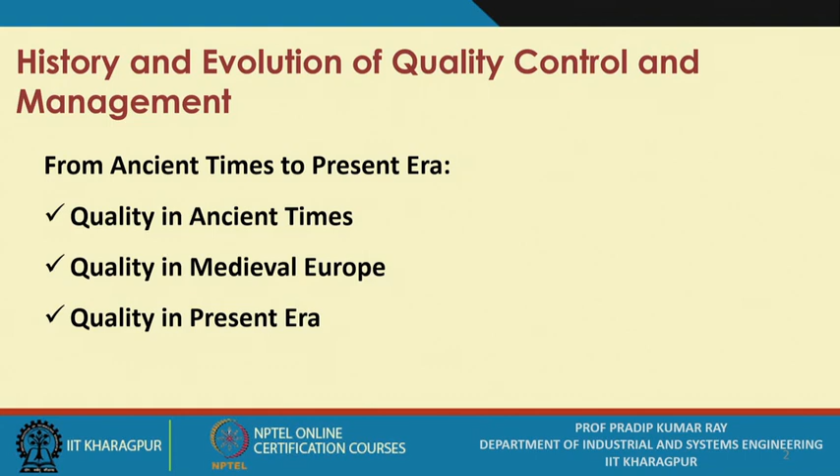One thing you must know at this stage is that the importance of quality is not a new issue. Since time immemorial, quality has been a serious concern in all that mankind has developed and used. The quality of civilization refers to the quality of living standards, products, housing, roads, and this awareness regarding the importance of quality is not a new one.

It started with the onset of human civilization. But before we refer to the various tools and techniques used under quality design and control, we should be aware of how the concept of quality was perceived in ancient times. Then we'll move to the medieval ages, and then the present era, mostly post 20th century onwards.

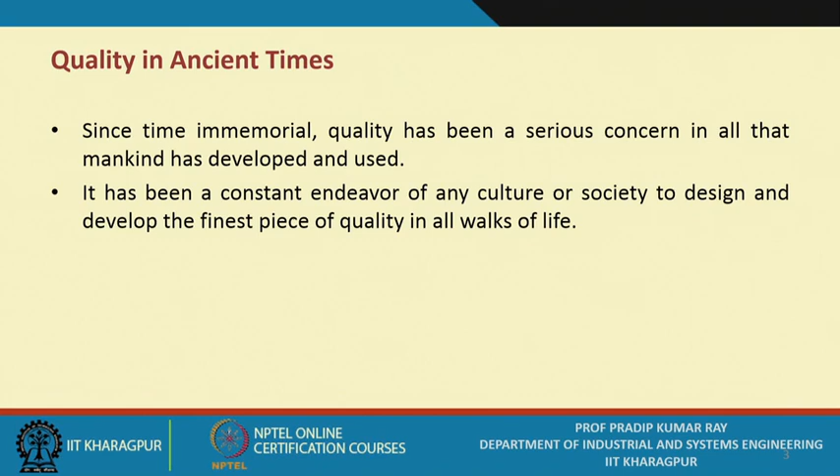There are hundreds of such creations referred to in the history of human civilization as the finest examples of quality. I will highlight a few. There are numerous such examples, like the pyramids of Giza in Egypt. This is a wonder, in fact - how could you design and manufacture such a product?

High roads and sculptures of the Roman Empire, the Hanging Garden of Babylon - these are the finest examples of quality. There were designers, quality experts, and manufacturers who created all these unique examples of quality. The Great Wall of China.

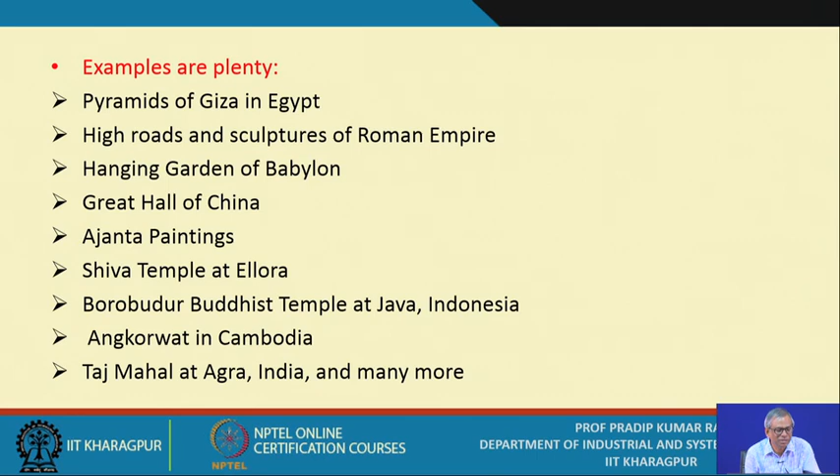This is not a hall, it's the Great Wall of China. The Ajanta paintings, the Shiva temple at Ellora, the Borobudur Buddhist temple at Java, Indonesia. Angkor Wat in Cambodia, the Taj Mahal at Agra, and many more. You are all aware of such creations. Whenever you visit any place, you see many such creations - in hundreds of cases, these are the finest examples of quality.

This continued for say 1000 years, 2000 years. Now, when you talk about medieval Europe, European organizations and systems contributed a lot to the field of quality since the days of the Renaissance.

In Renaissance Europe, in the 15th and 16th centuries - exactly 14th to 17th century - there had been the finest paintings and architecture developed. Craft guilds were formed. Initially, when they started creating quality products or quality systems, it was the responsibility of one individual, who used to be the designer, the manufacturer, and the seller of the products, all in one.

Subsequently, when demand increased, under the tutelage of one such quality expert, many persons needed to be trained. In medieval Europe, accordingly, craft guilds were formed, where apprentices used to be trained on quality of carpentry, painting, cloth washing, tanning, masonry, etc. This is very unique in today's context.

Like we have industrial training institutes today, we carry out many kinds of trade tests to build skills among motivated persons, workmen and all those. This is a must, in fact - without having skills, how can you produce a quality product? For creating a quality product, you need human labor, so skills are very, very important.

The craft guilds were formed even during the medieval age, many centuries back. In the craft guilds, there used to be positions like apprentices, then the journeyman, and the master. Their focus had been all through - why don't you become a good designer? And if you become a good designer, we expect you will become a quality expert in course of time. There are many such examples, in fact.

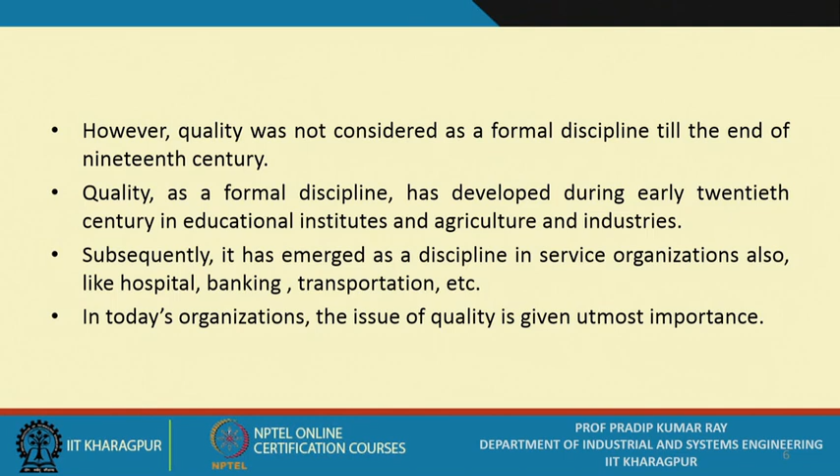However, during those days, quality was not considered a formal discipline till the end of the 19th century. It was individual based - under the kingship, the king may find someone who is really a quality expert, having some exceptional skills and knowledge. He used to be hired, or consulted for creating, say, a quality palace, quality roads, or quality painting. There are many such examples.

There are great persons, in fact, but this is absolutely individual based. There has been no formal system to create quality. So quality as a formal discipline has developed during the early 20th century in educational institutes, agriculture and industries.

Around 1908, 1910, when the Model T was introduced, it was mass production. When you go for mass production, obviously there is a requirement of a formalized system, and that system is a quality system.

So for the last 100 years or so, quality has existed as a very unique discipline. Subsequently, it has emerged as a discipline in service organizations also, for the last 50 or 60 years, like hospitals, banking, transportation, etc.

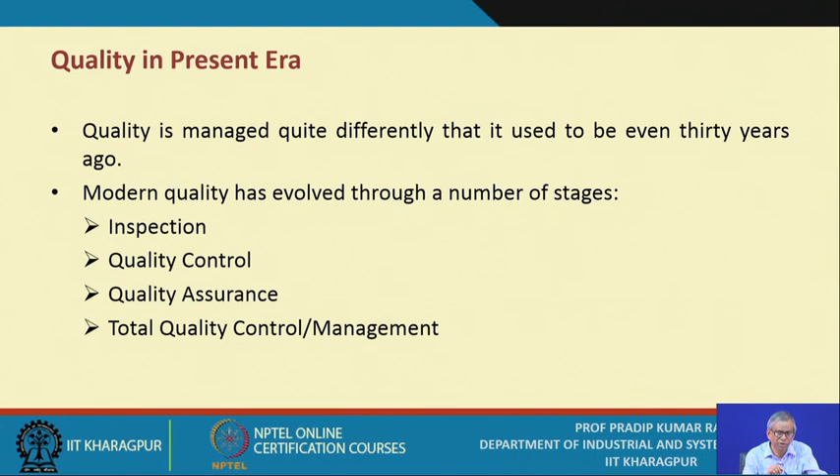It's a never-ending exercise or never-ending activity. So when we are really interested in incorporating quality in all sorts of systems, not only in the production systems, then it is referred to as the total quality control system.

So if we look at the characteristic features of a modern quality system, we sometimes refer to a benchmark system.

As a student of quality control and design, you should be aware of what are the best systems mankind has created with respect to quality features. When you look at such systems, and there are numerous such organizations, you study their quality systems, and in today's context you will find these quality systems, sometimes referred to as modern systems, have got some specific features you should be aware of.

The first one is customer focused. That means there must not be any argument with the customer. The product which I am going to sell to the customer, I will incorporate quality in that product as demanded by the customer. It is not what I want to deliver to him, but what should be the customer's requirement. So it should be based on fulfilling the customer requirements.

And defect prevention oriented, not defect detection focused—this is very important. Defect detection is essentially inspection-based quality control, where you are only bothering about inspection. Suppose I produce some 1000 units, and I know the production system is so complex that all these 1000 units cannot be defect free. So I expect there will always be some defects or defectives, and I create an inspection system to promptly identify all these defects. That is detection-based, but that is actually not a quality improvement exercise.

What you need to do is know the causes for quality deficiencies, and design the product and system in such a way that there will be prevention of defective items or defects while producing the product. So the basic message is defect prevention, not defect detection. That should be our goal for quality improvement, and ultimately it must become a way of life, part of organizational systems.

We come across several types of manufacturing systems, grouped under three categories. At one extreme you have the job shop, at the other extreme continuous processing, and in between batch production. So job shop, batch production, or continuous processing like a chemical plant. Batch production is normally repetitive manufacturing, like car manufacturing systems, and there are numerous job shops we have.

In any kind of manufacturing system, quality of products, processes and systems is the prime concern. Never assume that you only need to look into product quality—you must also simultaneously look into systems quality as well as process quality.

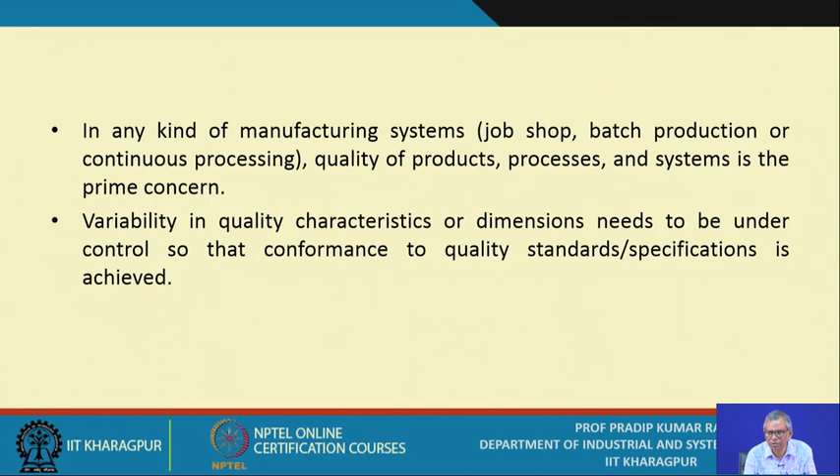Now, variability in quality characteristics or dimensions needs to be under control. Suppose the specification is 20 plus minus 0.01, that means the tolerance range is 19.99 to 20.01. Whenever you produce one unit, you check the exact value, whether it is within this range. If it is within range, it conforms to specifications and you accept it. If it is outside of the specification range, say 20.5, obviously you are not going to accept it.

So when you produce 1000 or 10,000 units consecutively, you cannot get the same value. That means there will be variability, unavoidable. Even with the most sophisticated systems, each dimension cannot be the same. So under these conditions, you must get an idea about the variability with respect to the quality characteristics. So we say that this variability must be under control. Any exercise on quality is essentially an exercise on variability, and this variability should be measured, and you have to take measures so that the variability gets reduced.

And for controlling variability, you need to consider many options or alternatives, like changing the raw materials, changing work holding devices in machining operations, or changing the basic technology you employ. So any exercise or assignment we carry out on quality control and improvement, essentially at the ground level, is an exercise on variability. Later on I will tell you how many different ways, what alternatives are available to you to measure variability when the data are collected.

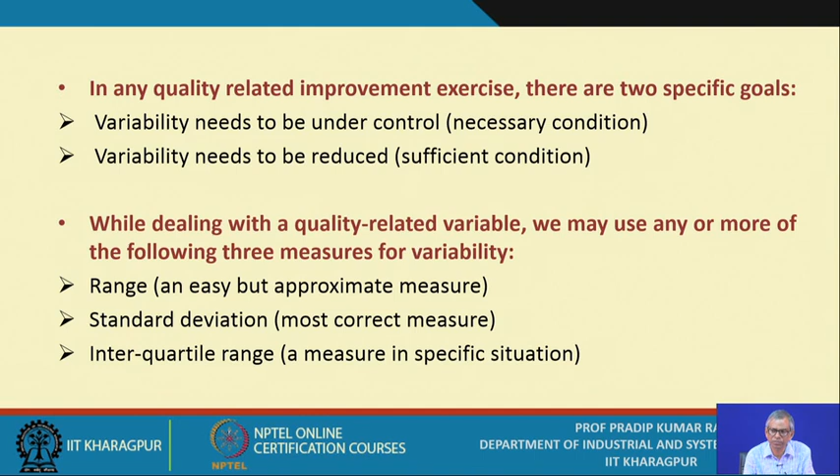Now you always talk about improvement. That means whether you can reduce it from say 0.25 to say 0.15, in one step or multiple steps. So that is basically controlling variability or reducing variability, which is the sufficient condition. So in any exercise on quality, you must remember two things: first, what is the present level of variability, whether it is under control or not; once that is under control, next you think of how to reduce the variability.

While dealing with a quality related variable, we may use one or more of the following three measures of variability: the range, which is an inaccurate measure, but sometimes we take a sample of the values related to a particular quality characteristic. This way you collect data, that is the first level. In a sample of size n, n may be 100, 200, or 25. So you have to select the sample size based on certain rules, which we'll talk about later.

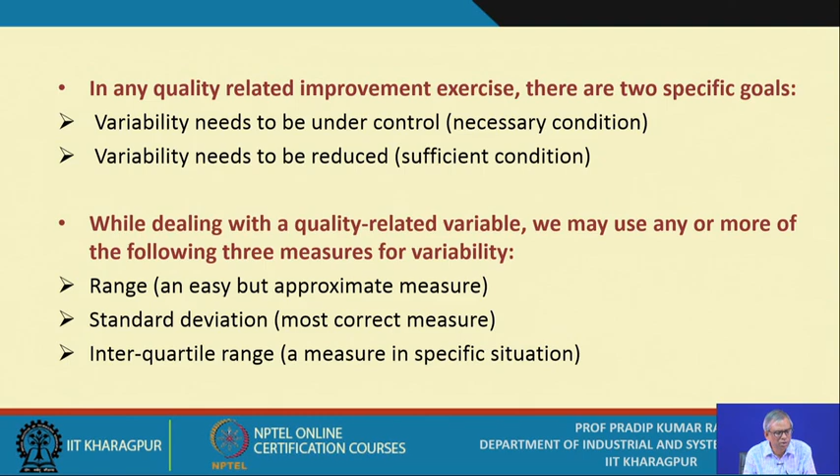Whenever we look into developing quality control techniques, the starting point is the formation of a sample. In a sample, when you get say 10 such values, you have a maximum value and a minimum value. The difference between the maximum and minimum is referred to as the range - an easy but approximate measure. If the value of n is greater than 10, it may not be that accurate as a measure of dispersion or variability. But often when dealing with variables data, the sample size is kept within 10, so this may be acceptable as a measure of variability.

The most accurate measure is the standard deviation - the most correct measure. You are aware of how to measure the standard deviation for a sample. And in certain cases, we also measure variability or dispersion with the interquartile range, or IQR. So while carrying out exercises on this, we'll consider all these aspects later. Depending on the type of problem and the accuracy level you want, you have to select the appropriate measures.